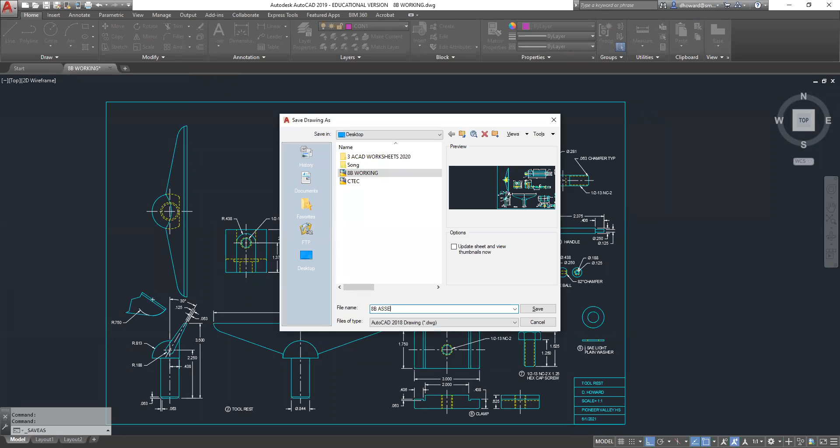Okay, guys, so we are looking at the finished working drawing. And first thing I'm going to do is save this guy as our assembly drawing, so I don't wreck this one. Okay. And now it's time to have some fun with this thing, right?

You know what I'm realizing is I am going to look at the final picture of this guy because I want to know what it looks like when it's done here. So I have that handy on my screen as well. I know you can't see it, but you should be viewing it too. Have it somewhere while you're putting this thing together. So we are going to do top, front, and right side just like we did before. We have all those views at our disposal right now. So let's get started.

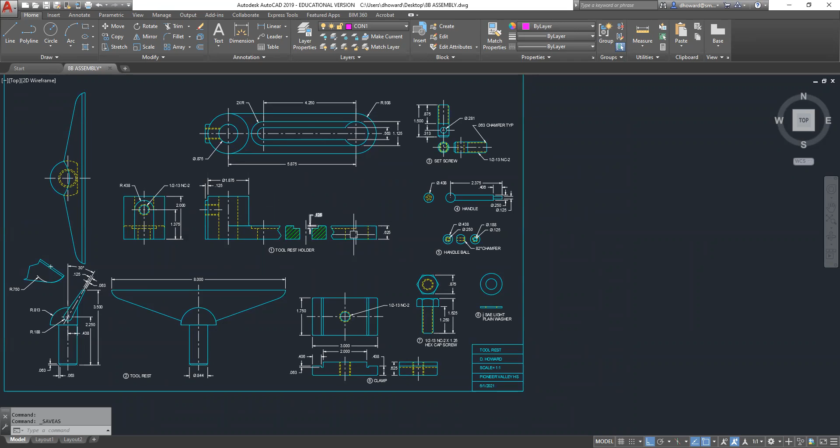We'll go with, how about the front view to begin with here? Okay. So the front view is looking at the tool rest holder in this position right here. I'm going to just drag this stuff out so it's not in the way. I'm going to turn off the dimensions. Don't need those on this drawing. Pull this guy off and kind of do my assembly work over here. Okay.

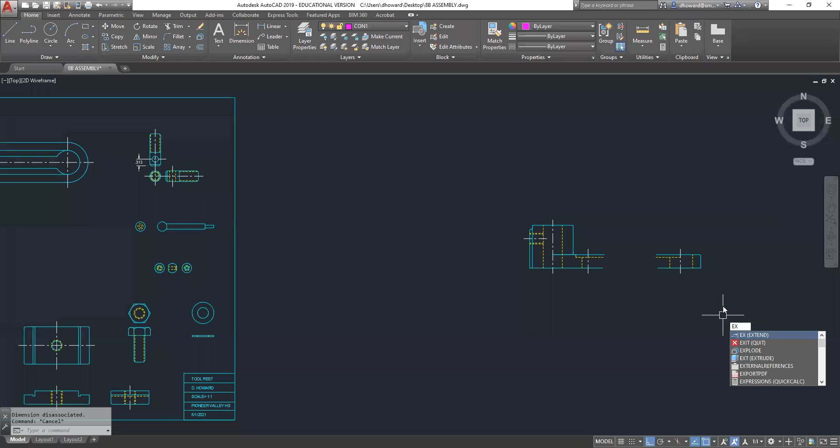And right away, I got to get rid of this here. So we don't need any of that stuff. And we'll just extend these lines out. And I can just type extend if I wanted, or extend them individually. I'm going to do EX. Okay, awesome. So I got the holder in position. I'm going to zoom out just a little here.

Next piece for our front view. Let's go with, how about the clamp here? So that would be this view right here. And I'm just going to put that somewhere kind of in the middle here, about right there. Okay. And then linking these two together is going to be our bolt. So that's this guy here and the washer as well. So I'll move him. And I'm going to grab him by his center so that I can line him up with this thing on center. Something like that. Leave a little room for the washer. Maybe right there.

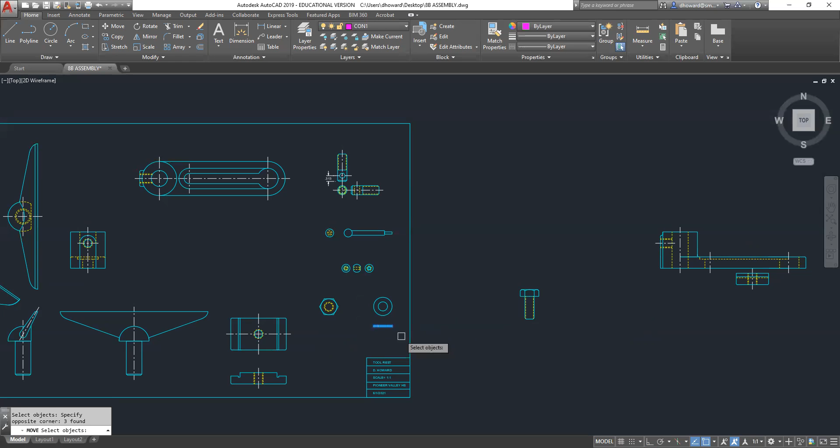You know what? Let me get those two together first. So I'm going to put him here, and then I'm going to put the washer on him right now, because they really go together. Zoom in on that stuff a little bit here so I can see what I'm doing. Grab it by the middle. Put it on the middle of this one there. Boom. Looking good.

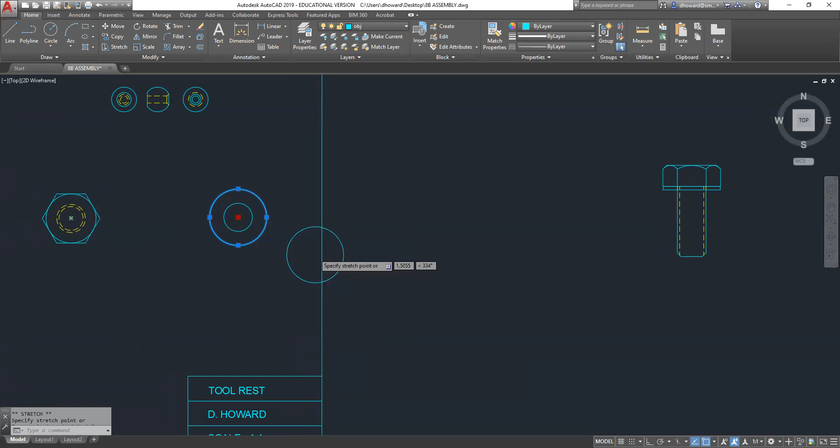That's funny. I just realized I think I should have made that slightly bigger. Boy, I thought that stood out beyond the edges. It is right on the corners. I think just for fun, I am going to make this thing a little bigger, 1/16 larger. Oh, 1/32 larger. Offset that guy 1/32 more all the way around. Okay. And so that would do the same to these guys. There we go.

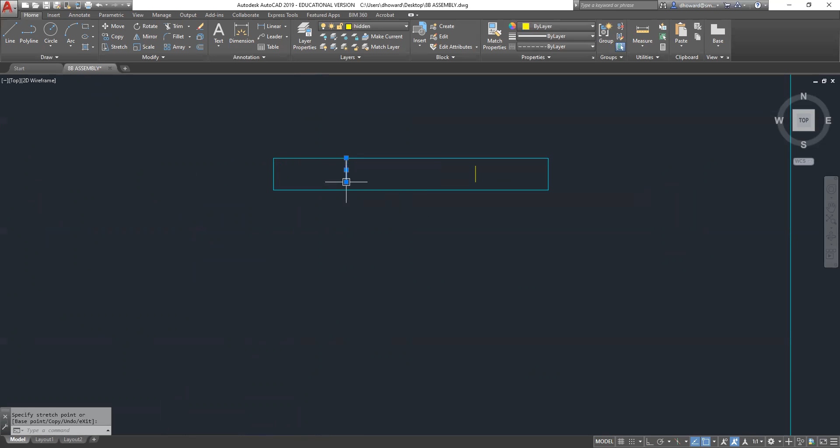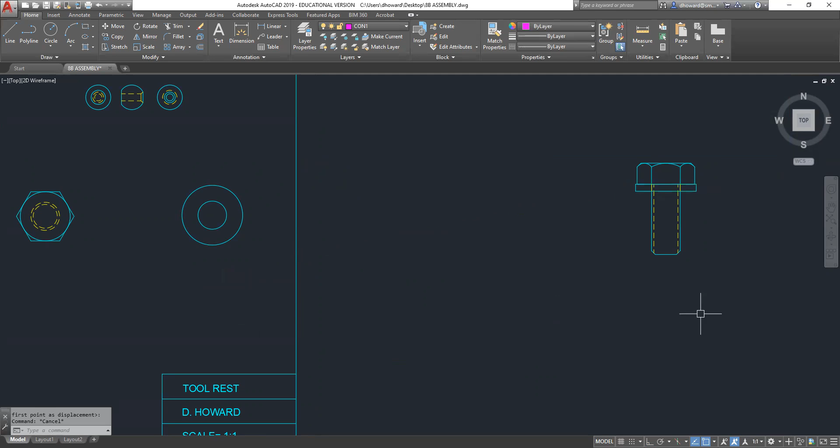So just make that guy a little bigger, just so it stands out a little better. Extend that up. Sorry, so I just made that thing 1/32 larger. Just offset the whole thing 1/32. And let's see what that looks like when I put them together now. That's better, just slightly bigger. Okay, perfect. And I'm going to zoom out a little bit.

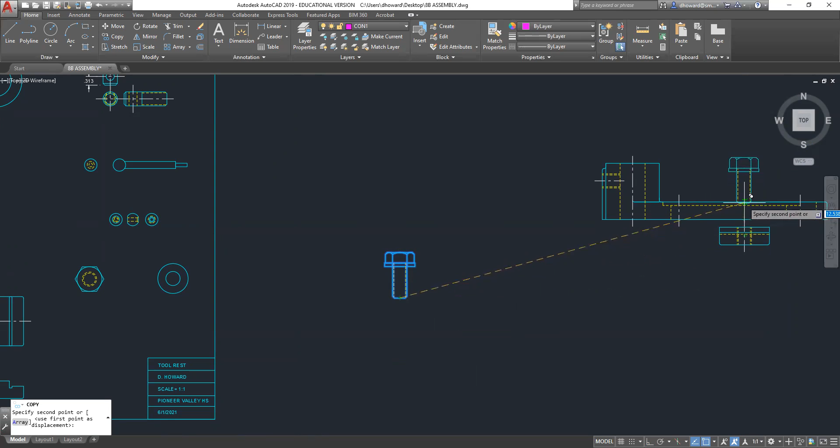And this guy, I know it's going to be used again, so I'm going to just copy him right now. Grab a copy of him for this and put him on the center line of that thing. And technically, it would rest on the bottom of this hidden line here if we're doing this correctly. So I think that's what I'm going to do. I zoomed in here just so I could show you that. But I'm just going to move them down. So I got them lined up and down like this. But just bringing them in here so we rest right flush on that surface there.

Look at the washer, it just gets absorbed completely. But if you wanted to have it floating a little bit above, whatever, just to be able to see the different lines, I think that would be fine. I think I'm going to do that. Just a little bit of float there, just so you can see the lines aren't quite on top of each other. That's perfect. Okay.

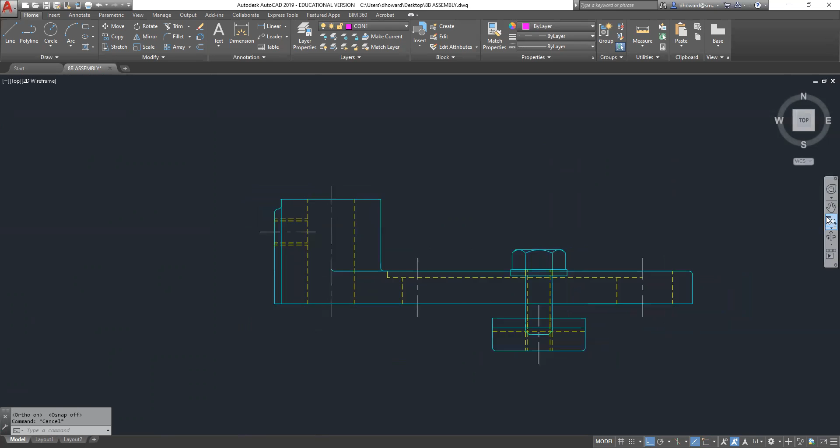Zoom out. So zoom out some more here. And I'm going to go to the right. I guess, what view am I in here anyway? The left side, or actually, technically, that would be the front, huh?

Put that guy in place here. Make sure those are lined up. Just over here, give it some room. And then this is what I was saying with this. You could either copy that bolt or move this one into place. I do want to get them at the right height though, but that shouldn't be too hard.

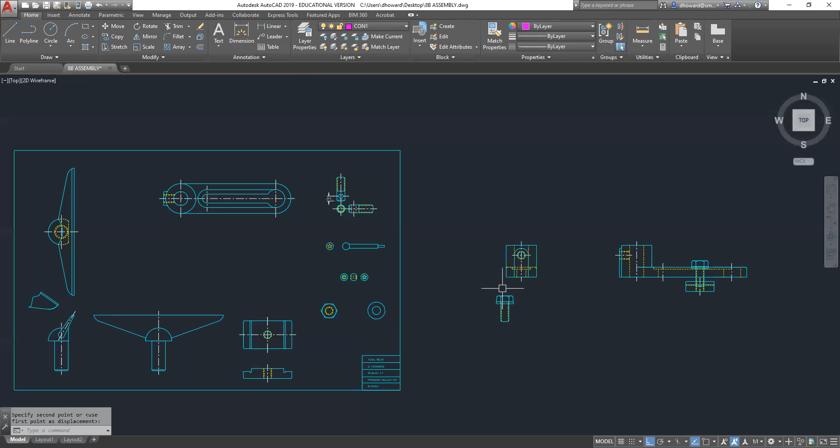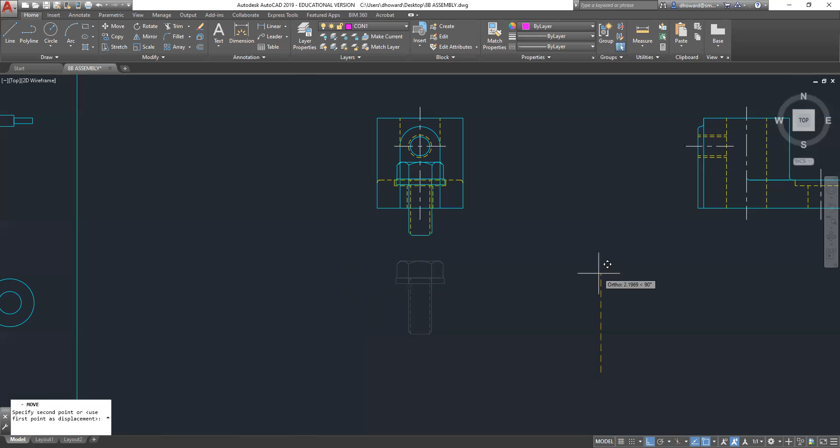I'm gonna zoom in on that and move this guy. And remember what I was doing here. Just moving basically from the bottom middle of that so it lines up with the bottom of this guy. And just kind of floating it above that space a little bit so you can see how it fits in there and it's right, not quite on top of the lines.

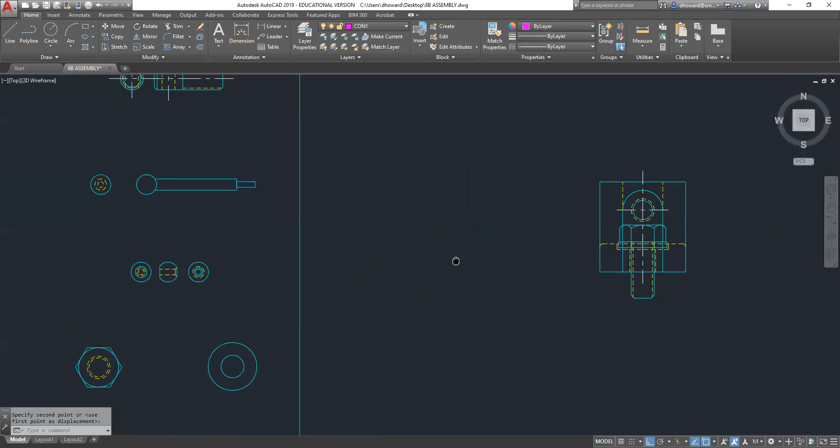Okay. At some point you got to decide what's going to stay object and what's going to be hidden. Technically, all of this would be hidden, and you could do that if you wanted. I'm not going to mess with that. I do need to bring this guy over right here.

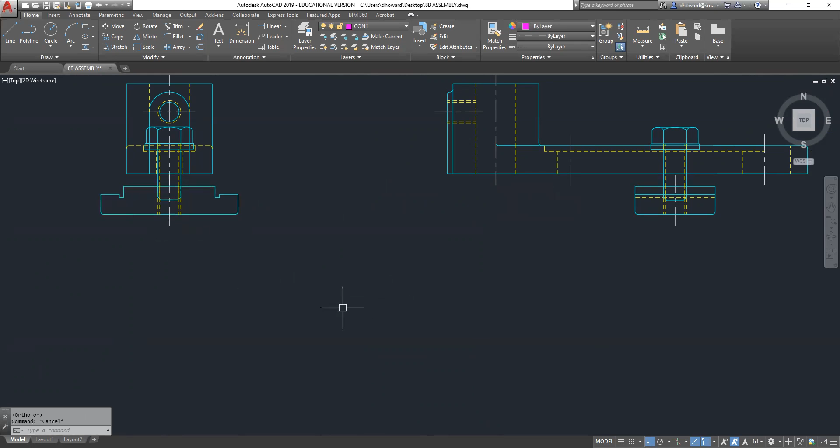And I want to get him on the same line as this one here. Either I could draw a line or I could just kind of eyeball this. I'm using AutoCAD's, you can see that dashed line there. It does a little projection for you if you're careful. And now I'll just move it again. I know I got close. Right across there. Boom, right on, okay. So far, so good. We got a bunch of these pieces lined up.

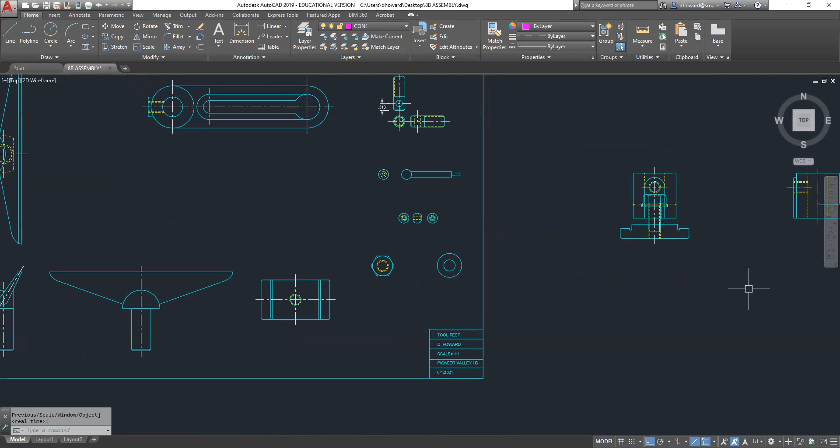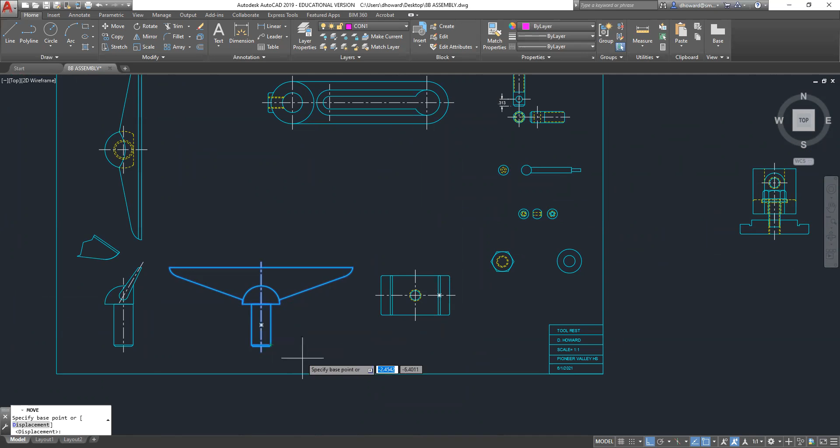Zoom out. I'd knock out this blade. I want to see how that's going to fit in before I go much further because it's really big and it could interfere. So I'm going to grab this one here. And it floats, it's meant to be adjustable. We just got to be consistent. So I think I'm going to put it pretty much just right there, so it's floating above a little bit. I just need to be consistent with the other one.

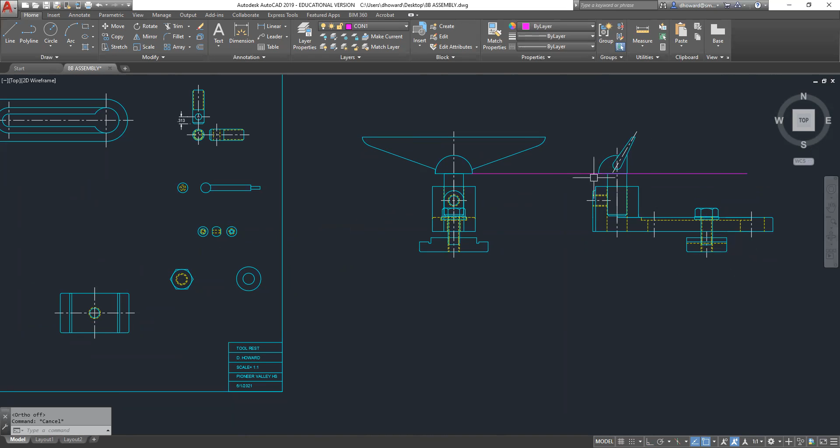I could draw a line across if I wanted to do that just to help me guide this other one in. I think I'm going to do that. Perfect. Okay. Still waiting to do that top view. What else do we got to put in here? The pin and the handle. That's pretty easy. We can do this one right now. Let me zoom in on this.

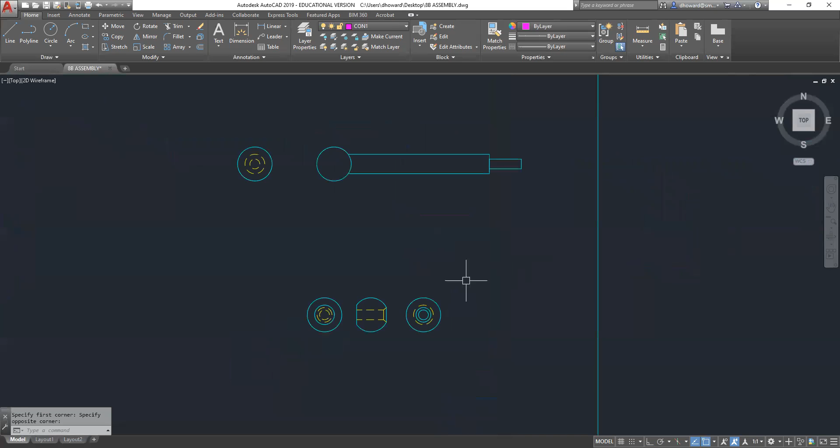So this thing looks, we're gonna have it be the same in, well, let's see. Let me move this first. Move that from the center to there. Okay. And that little bit that sticks out in the end is supposed to be ball peened. In other words, smashed to fit that space and actually rounded out. So technically, this all goes away. You could leave it like that or extend the curve around if you wanted. I'm just going to leave it like that for now.

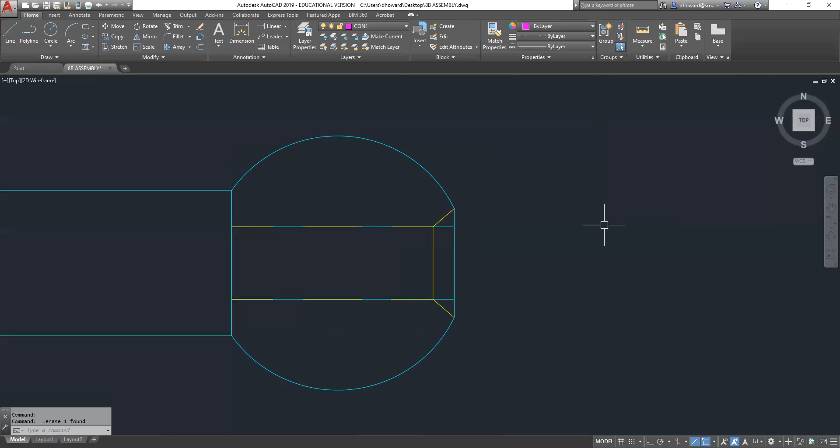And place this guy. So he goes in this screw here, the set screw. I think I have this arranged a little differently, but I think in the side view, I'm going to copy this guy and I'm going to rotate him 90 degrees. So just RO enter and then 90 enter.

And I'm going to place him in the set screw over here, or move the set screw to, basically, the middle of this. There we go. And now insert that into this view over here.

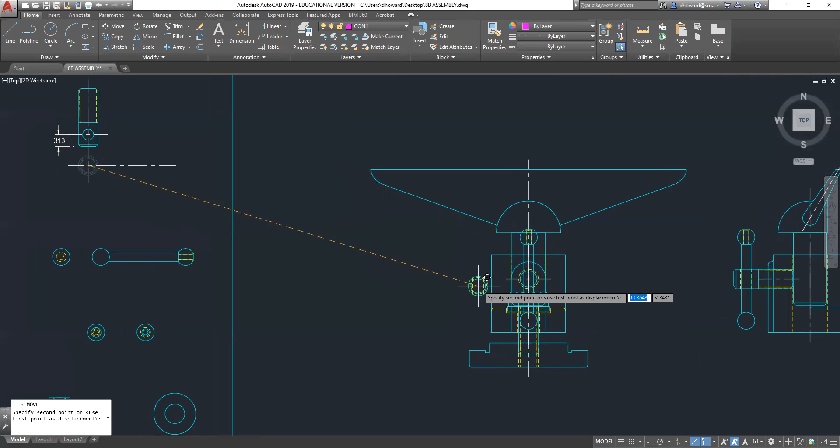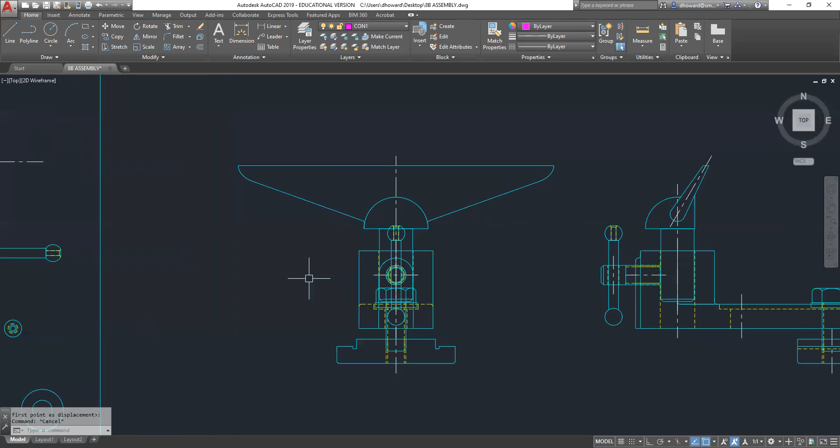That's what I was saying, a lot of lines on top of each other, and we haven't put the set screw in yet, which is also this. And that definitely has to go in there. So grabbing its center point and putting it on here. A lot of stuff. I think I'm going to leave the handle like that. I know it's a little crowded. It might look better if it were horizontal, but whatever. It's done. Just be consistent, however you decide to mount it. If you're having it horizontal in this view, then it needs to be horizontal in this view.

Okay, so I think that's pretty much it for those two views. And now we have the top view to do. And the question is, how do you want to orientate the top view? I am going to have it over this view. So technically the way I'm going to have it laid out is we'd have a front view, a top view, and a left side view. So that's how it's going to be laid out for me.

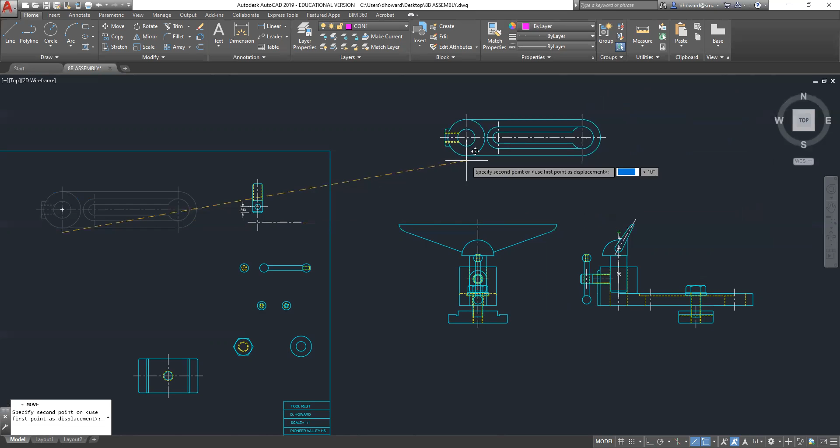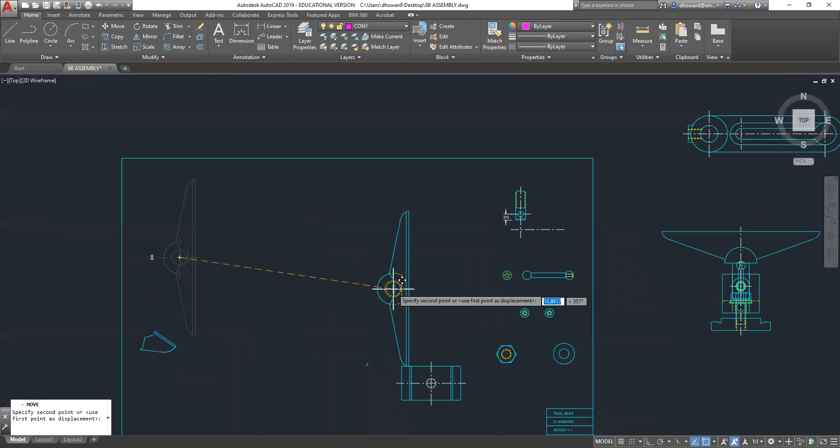So I'm going to move this guy. Get him lined up. You know what, I'm going to have to draw a line here because I need some space. The real reason I need some space is this blade is huge and I need to position that first. That's what I need to bring over first. So let me grab that. I need to leave room for it. All right, I think that'll work. And then I can move this guy. Good.

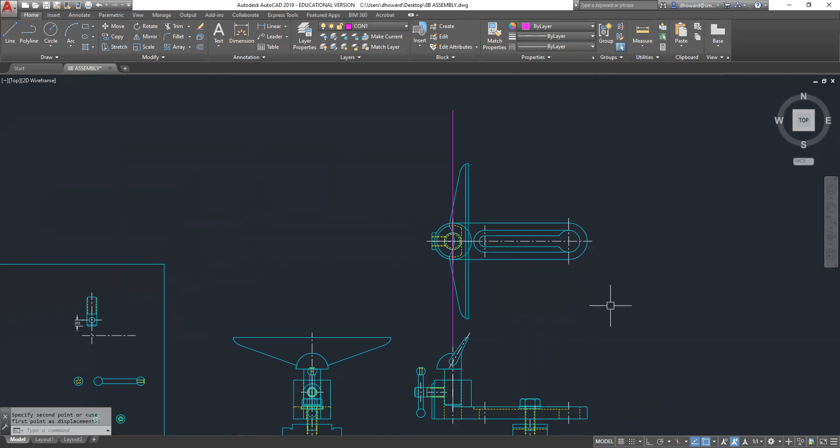And then, of course, our clamp. Put him over here and need to rotate him 90 degrees. And make sure he's lined up here. I'm going to draw another line just so I can get this for sure lined up correctly. Okay.

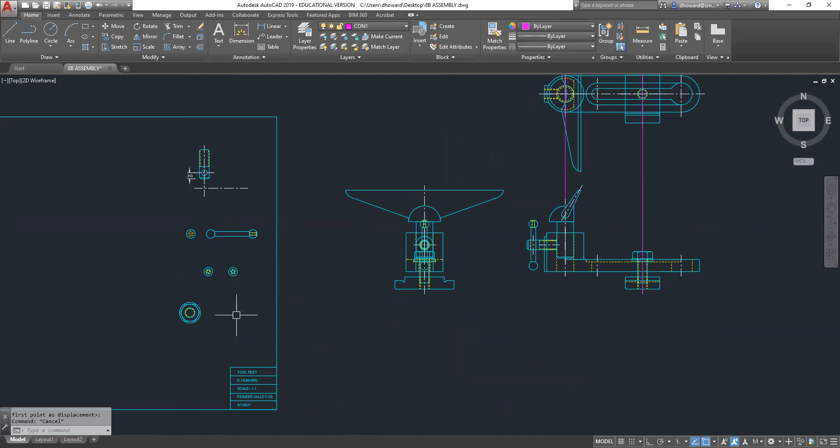And of course, the bolt and washer. Put those together and then move them together. Awesome. This guy here, it's not supposed to be there. Rotate him. And let's put his handle in place.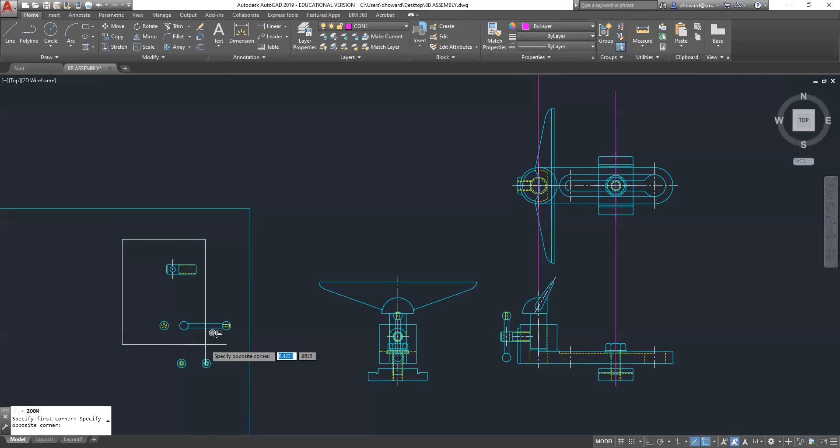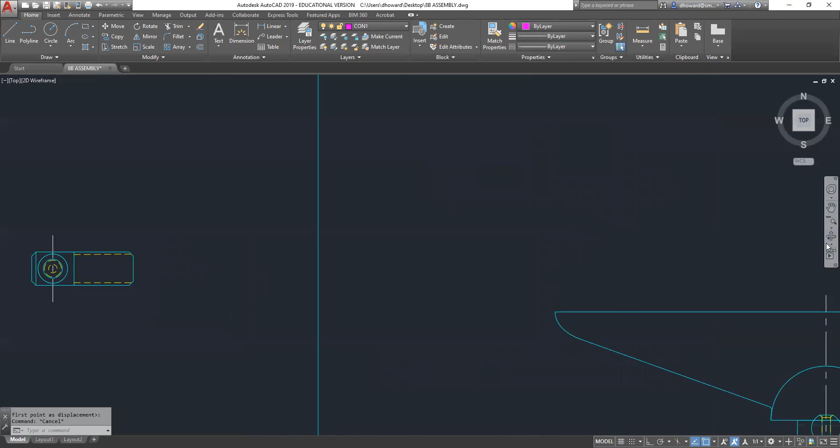So this handle in the top view is just this ball. So let me zoom in on there. All you're going to see is this ball portion is up, so that's the one we're going to use. There it is. So that is the set screw and the handle together. Grab it by the midpoint at the end there, and let me zoom in on here so I place this accurately.

So it goes right up against this surface here, which is this. In this view, it's just round because it's going to sit flush with that. So I'm going to grab it by the midpoint there and put it right there. Right on. Okay.

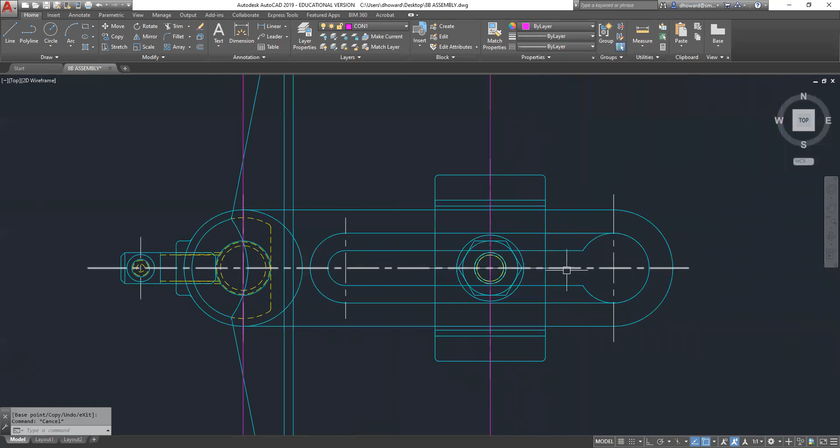Got some overlapping center lines. You might want to clean those up. Just pull this guy out. Bunch of overlapping center lines. Just get rid of any of those overlapping ones so that you can see the actual dashes. You may want to put one here.

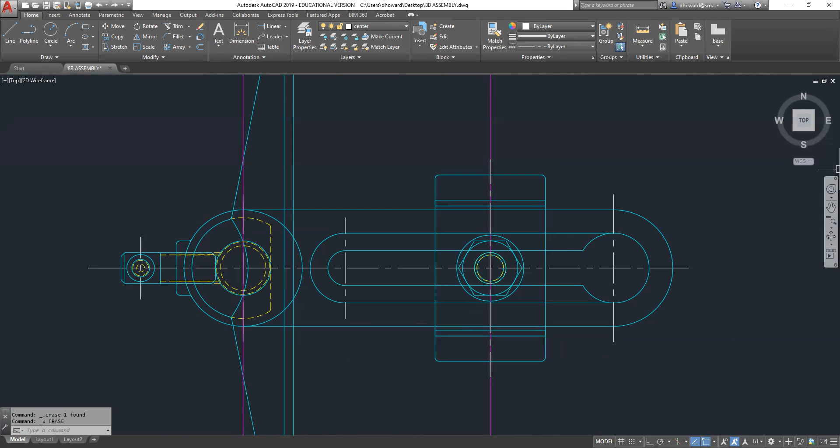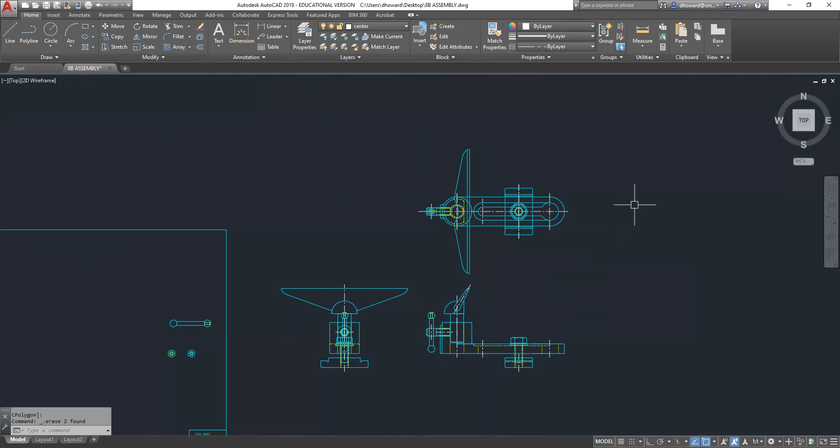You may want to get rid of some overlapping circles. It's up to you how much detail you want, what stays hidden and what's not. We got a bunch of overlapping hidden lines here, of course. You can go through and do the fine detail work on that on your own. But basically, that is it. That is the assembled view. And just like last time, you're going to go through and put little notes, the leaders pointing to each part, and make the little table with their names and materials and such. And I'll post that in a little bit.